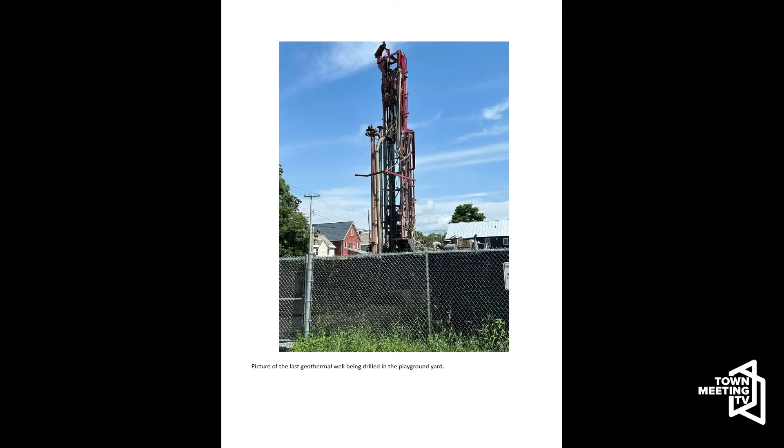Yes, because that is now removed, we need bigger ductwork to be able to bring the fresh air ventilation into each of the classrooms.

So if you supply air in, it needs to be returned out. Because we didn't have the ceiling space, the designers decided to put the ductwork on the roof. All right, so we're looking at the ductwork now.

The boiler room, 1904. I know we did some upgrades from then, but the original floor was there. So it was the dismantling of the entire boiler.

So there was no air conditioning in this building. Correct, so it was all heating. All heating facility. So there's a picture of the old boiler room.

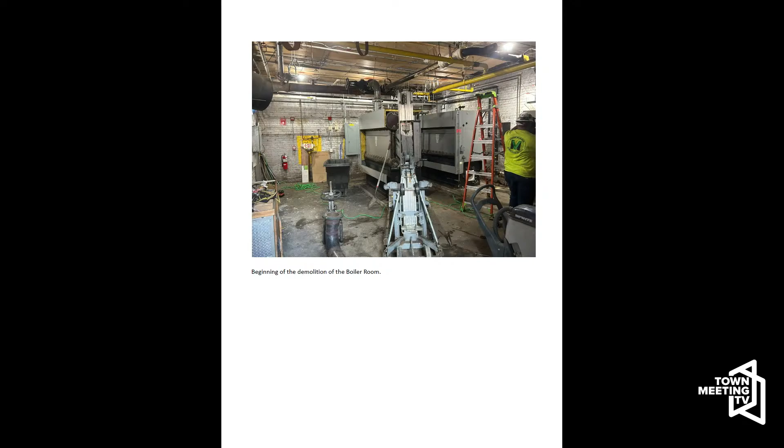And it said the old noisy air compressor was removed back in May, replaced with new electronic temperature controls. And I know that we're working with BED as well, and there'll be some pictures later.

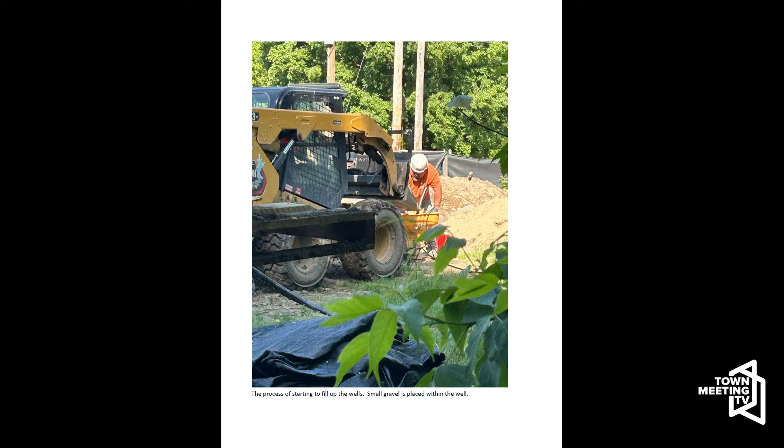I know we were running some electrical wires underground from the pole. Yep, new transformer that we had to put in.

So this is the start of filling up the wells with small gravel within the well. Process of grouting the wells, like you just spoke about.

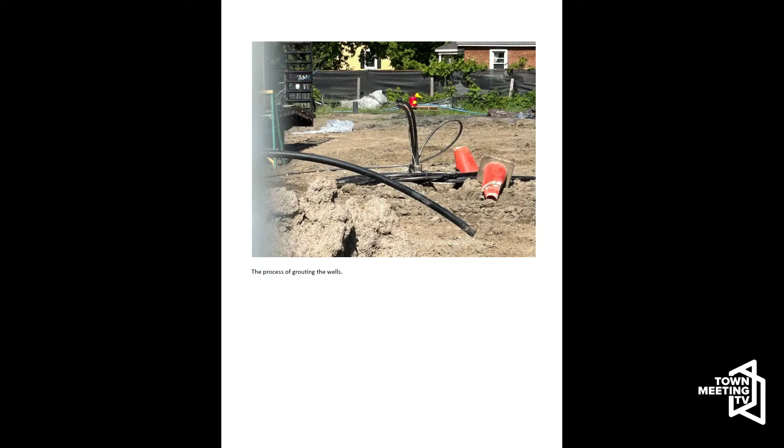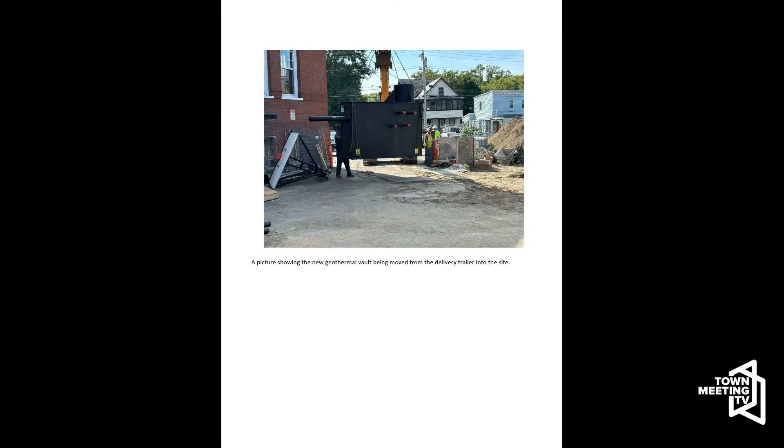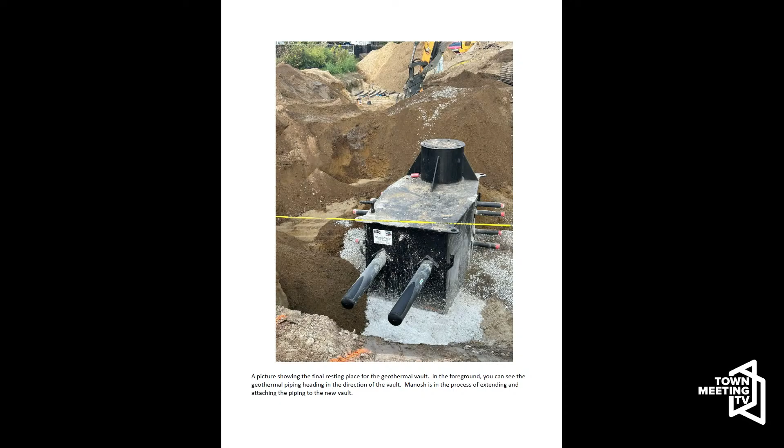So all the piping from all of the geothermal wells gets collected to this vault. Then from the vault, there's only two pipes, a supply and a return, as you can see at the bottom here. One goes into the building and the other one returns back to the vault, which as it returns is then separated into the 30 different smaller pipes that go out to all the individual wells. Unbelievable.

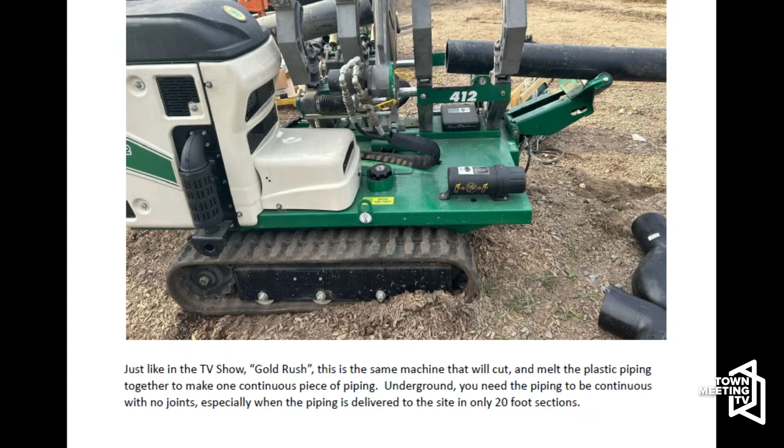And I loved looking at this machine. So the 20 feet piping, that's how, hopefully you're never going to be digging up for a break. But these are seamed together. Yep, so this is the machine that seams all the 20 feet piping together so that it's a seamless run from the wells to the vault.

Correct. Okay, amazing.

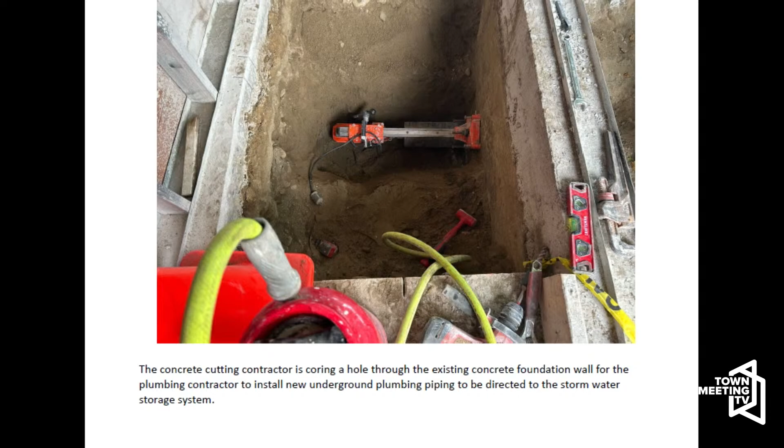And next, the concrete cutting. These are cutting the holes to get into the foundation, to get the storm piping from inside the building to outside the building.

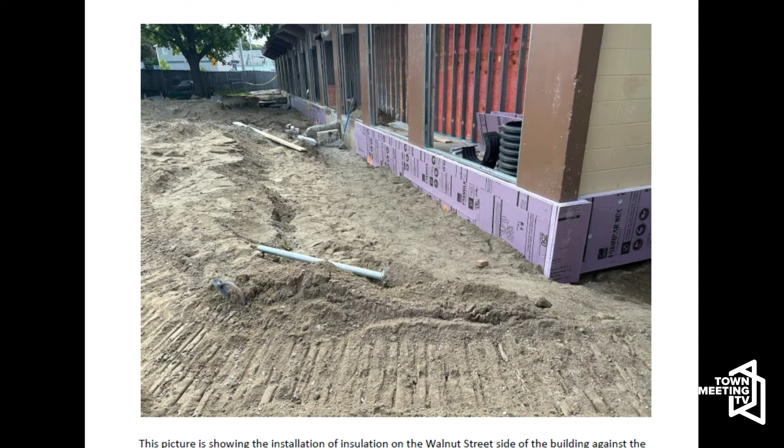Okay, thank you. And then, on energy efficiency, there was lack of insulation back in the 60s. Now there's new, more efficient insulation to keep this wing as warm as the main building. So all the purple insulation is against the foundation. More pictures of the foundation and how it sits up tight.

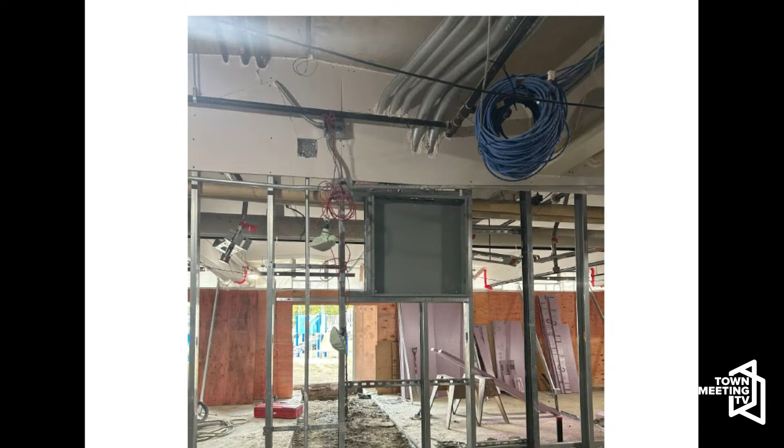And then the new conduits are installed for the new junction boxes all through. So a lot of the building - this is the cafeteria. No, that's one of the classrooms, leading out to the playground. Yes, correct.

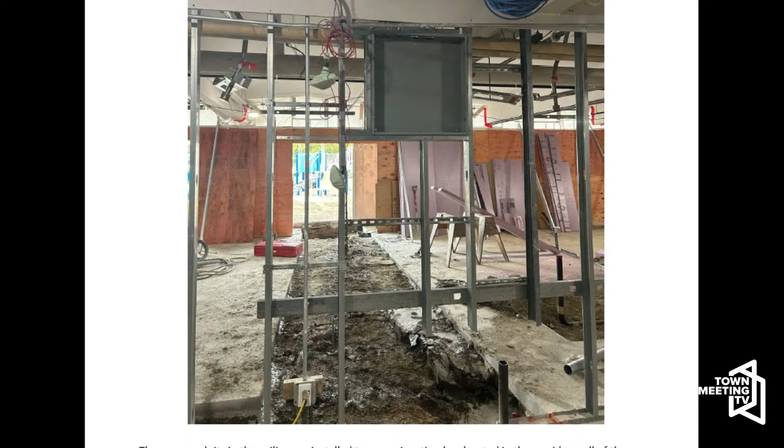All right, so putting all new walls, like you just said, new air in and out heating systems. So that entire 1965 wing, all the walls came down. Oh wow, amazing.

And here's the foundation that was being cut. Those are the two pipes that you talked about for this electrical room. All right, and the chimney.

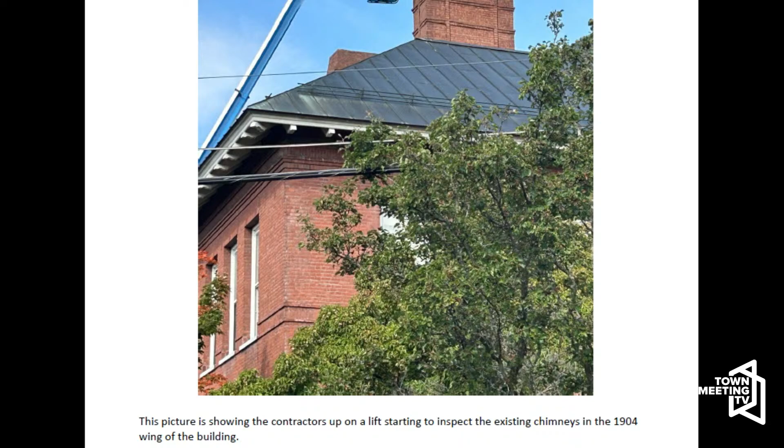I saw some interior photos of the attic, which were so interesting. What are we doing with the chimney? And I see the lift inspecting it. Yeah, correct, exactly that, inspecting it.

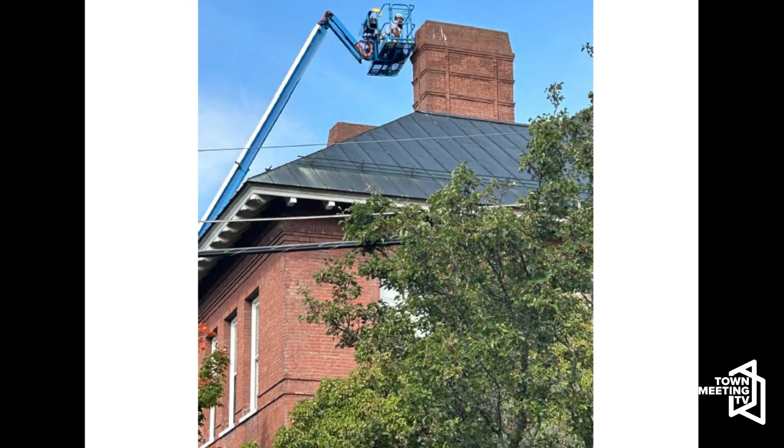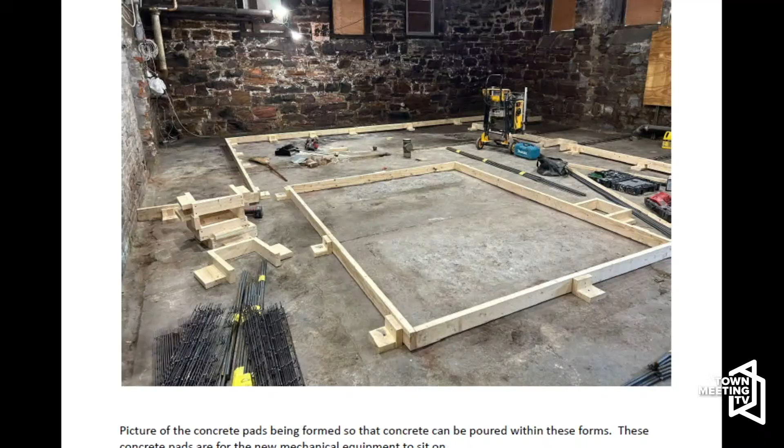Because we found that upon trying to run the new boiler flue up one of the existing chimneys, as the contractor got in to drop the new flue needed for the new boiler, they didn't like what they saw. They saw a lot of brick that were loose and whatnot. So we hired a consultant to come in and evaluate, because today's equipment likes to sit on a level floor.

Makes sense. And the old floor - because we had taken out a couple of walls within the old boiler room, which was actually the coal bin, and the coal ash that we found within the boiler room. So by taking those two walls out, it allowed the boiler room to get even bigger, to utilize that space. We like to set mechanical equipment these days on something that's solid and level.

This is the largest ticket price. When we think of the cost of the entire project, it's half the price, for a building this size and square footage. When we look at the budgets for this, that was your biggest price - your biggest investment. Correct, that's what I was trying to say.

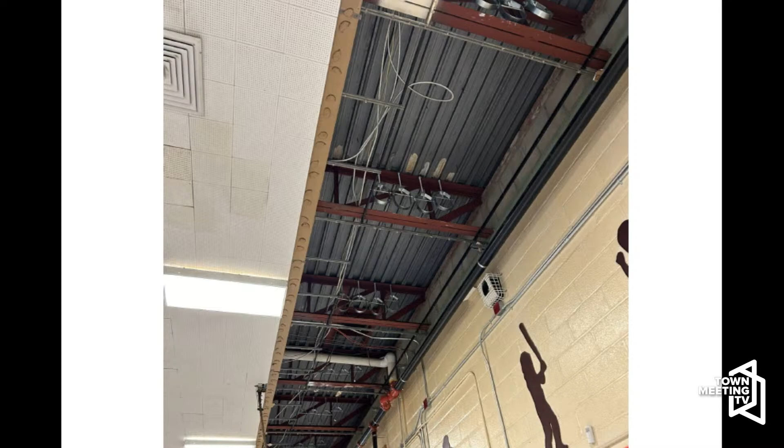All right, and a picture of the piping - I moved quickly over the dental area because we had to close the dental services down for this renovation to get to the exterior wall. And also the hangers - this is the gym. Piping can be placed so it's going up within the roof, in the joist space, so you're not losing any height from the building.

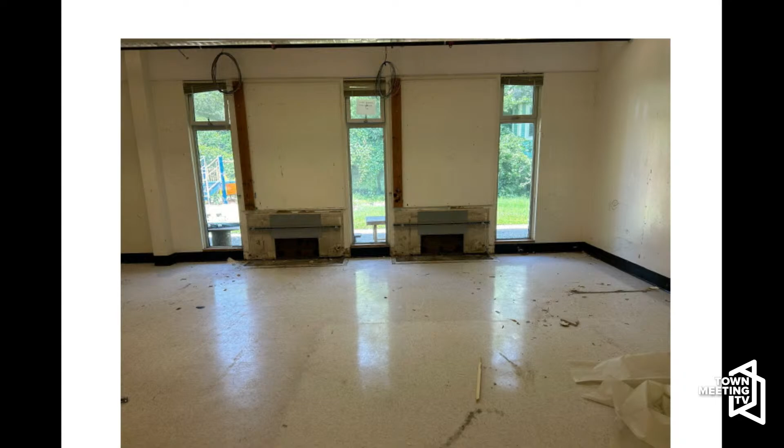Demolition of the mechanical room, the removal of the exterior walls. Thank you for these great pictures. I know they might make some people emotional, but I'm sure they know the investment that's being made, and the intricacies of what was under each of your cabinets.

And we're also getting new windows and lighting installed for the building's energy upgrade, and the bathrooms. That's just the storing, as much storing as we could do on site, within the library, and then what we moved over to St. Mark's to set up an entire school. So appreciative of all the faculty, staff, family and students that helped us in this transition.

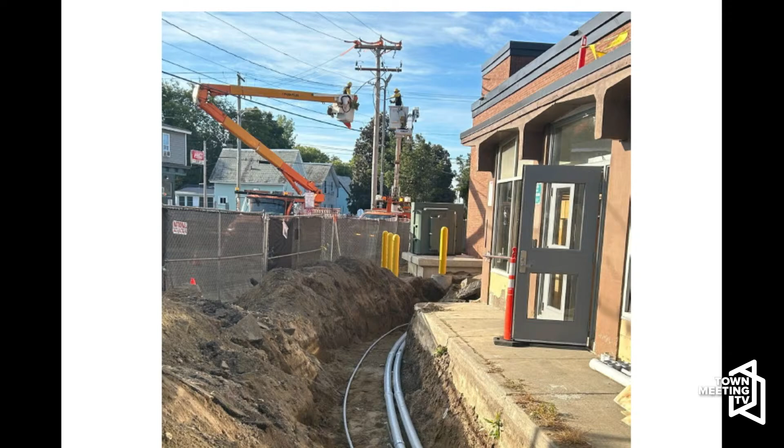It's invaluable. And now we get to the exterior of the building. What is all that piping? I see Burlington Electric Department on the pipe, on the utility pole. What is this piping along the ground?

So that piping is electrical conduit. Burlington Electric is giving us a new, bigger service, almost an 800 amp service. So we need to bring the new power into the building. Instead of putting it overhead, where there's really no ceiling space within the '65 wing, the contractor said, well, can we bury it? So we came up with a scheme to bury most of the piping exterior to the building, minimizing the conduit runs in the building above the ceiling. Wow.

So there's the start of the electrical conduits, goes from the telephone pole down to the new transformer. There's a major disconnect on the wall behind the transformer, and then from the disconnect going into the building are the conduits in the ground.

Wow. And for all your architect plans, how many sheets are we talking? Layers and layers, because you really start from the ground up.

If I had to guess, within the main packet of the architectural set, well, it was our vendors giving that exploratory work, that site work, all the things it takes, so many individuals coming together to give their professional opinion on the work they're going to be providing and services we're going to be providing and how they impact one another.

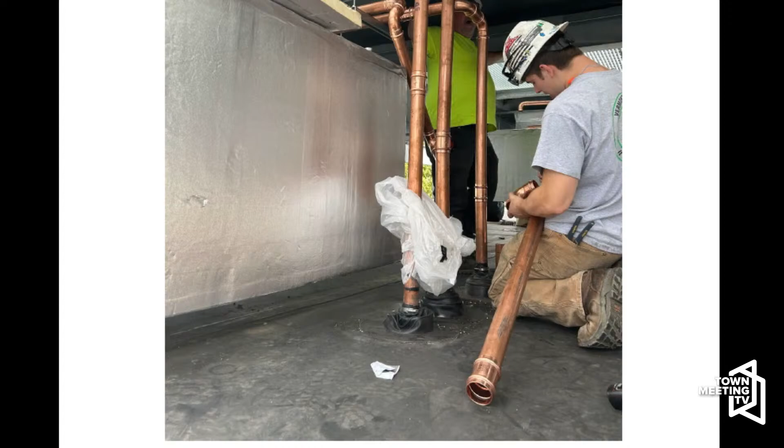Again, the piping in the ceiling, gone through the roof, installed by the roof unit, so we're going up to be the least, what's the word, least impactful.

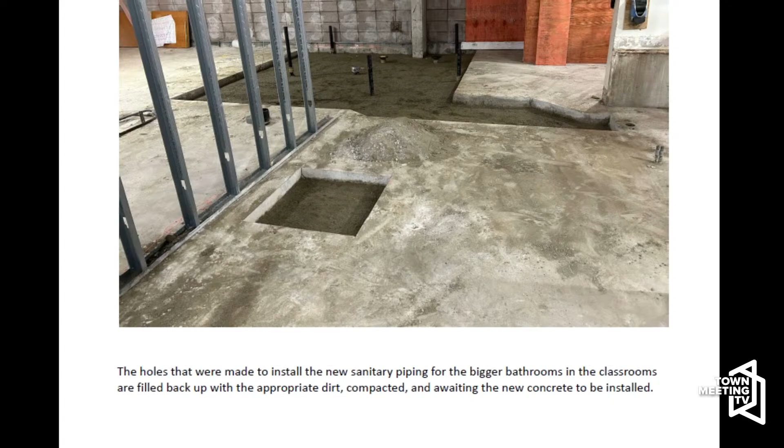Thank you. And I know the bathrooms, I remember we've had some overflow issues as well at IAA. So starting fresh with bigger bathrooms, not necessarily bigger, but because we had 1904 plumbing in some. We were spending so much money on parts that weren't available, fixing and Band-Aid. So to be able to start fresh and look at what's available is huge.

So these are the bathrooms on the 1965 wing. And using the excavator within the old classrooms.

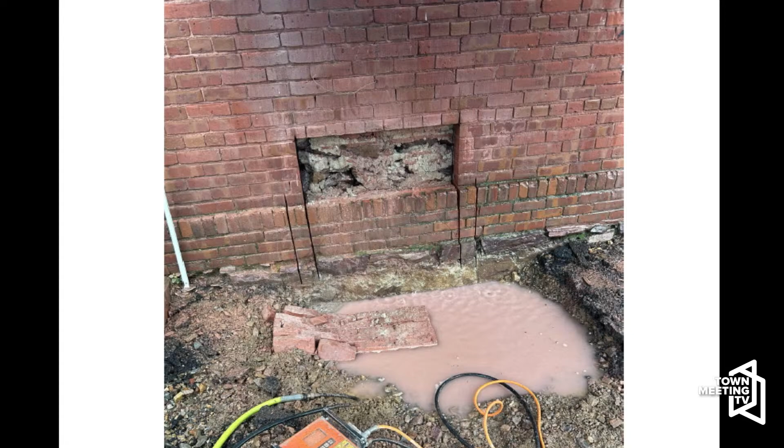The cutting of the new underground, the thermal piping. I remember when that opened up to go through to the boiler room from the outside.

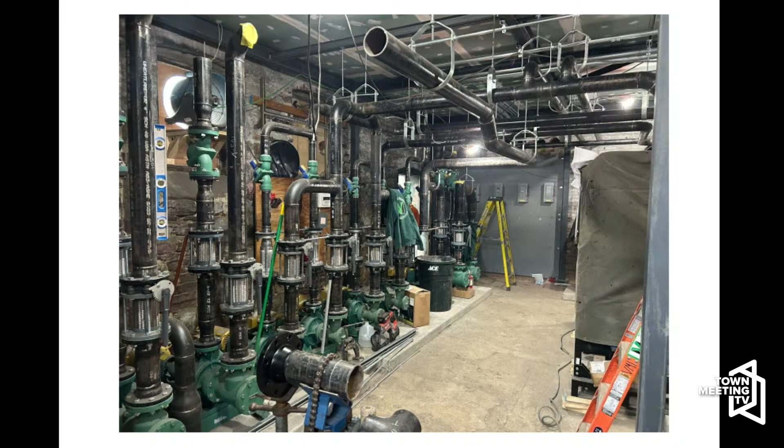This is the progression from Vermont Mechanical inside. Those are all the new units that head out to the geothermal.

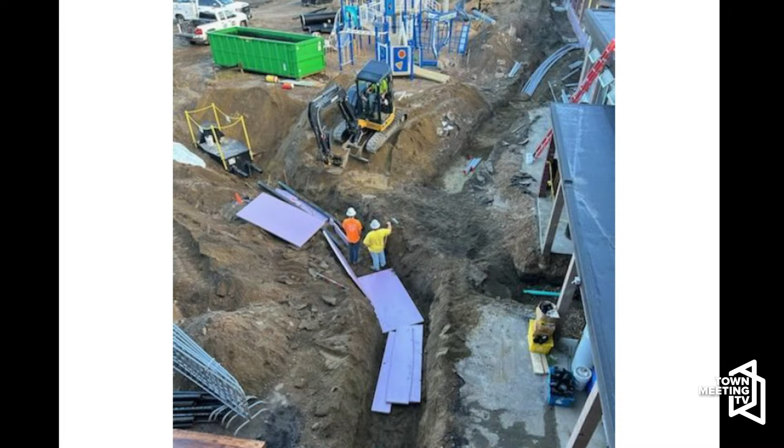Wow, amazing. And this is the bird's eye view. So going back a little to the geothermal from the vault.

Some of the playground equipment still there? Yes. Or working around it? Working around it, yes. Okay, great.

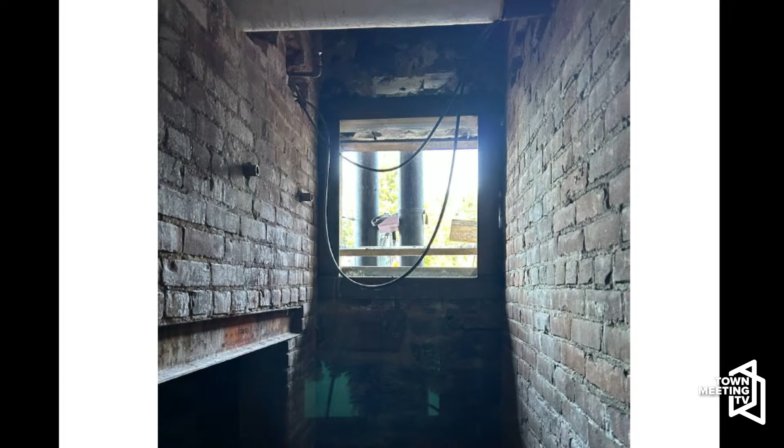Here we go, welding on the pipe like we talked about, making sure it's sealed. Ductwork going from the basement up into the attic, how efficient it is against flush to the wall, taking up the least amount of space.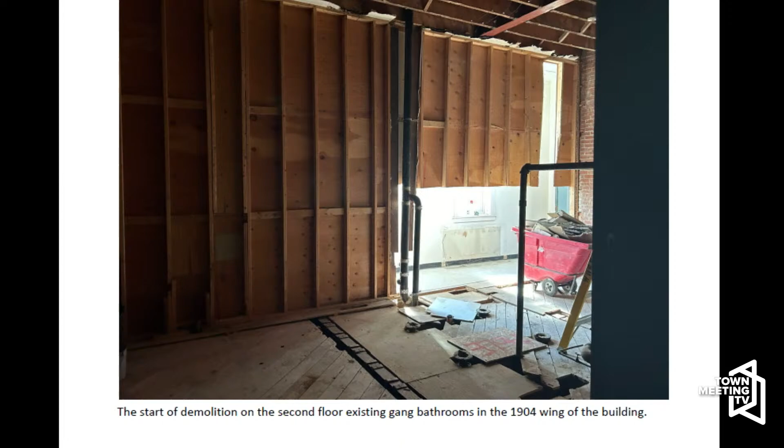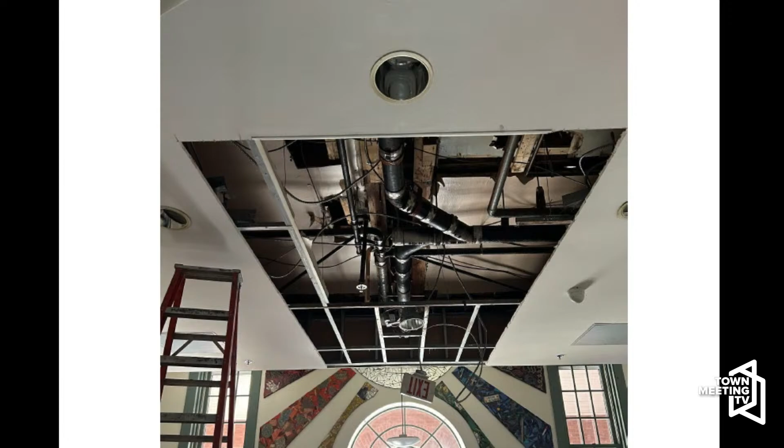Demolition on the second floor bathrooms. This is the back side of the second floor bathrooms in the 1904 wing. And the beautiful entrance, the picture showing the sanitary piping, which is from the ceiling, the lobby, to accommodate new plumbing fixtures.

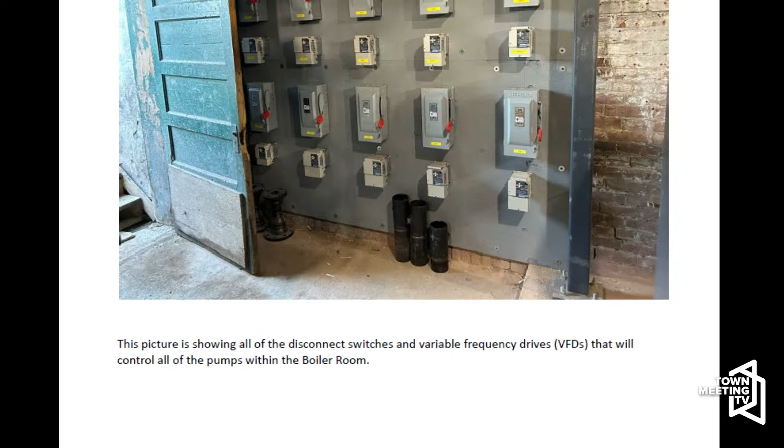All the pipes from the different areas coming through. Wow, so these are all... those are all the disconnect switches for the pumps in that boiler room in the 1904.

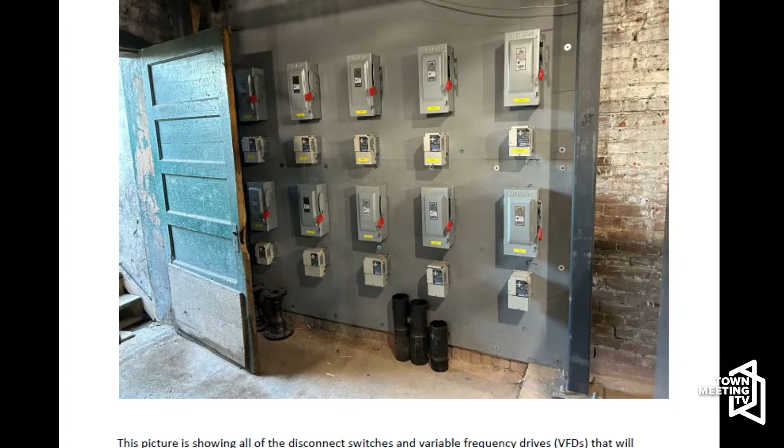So will we have a P-Touch machine and be labeling all these? Yeah, that's my favorite, when you go down and it says someone hit the breaker, right? Then you know who's doing what. What breakers to what device.

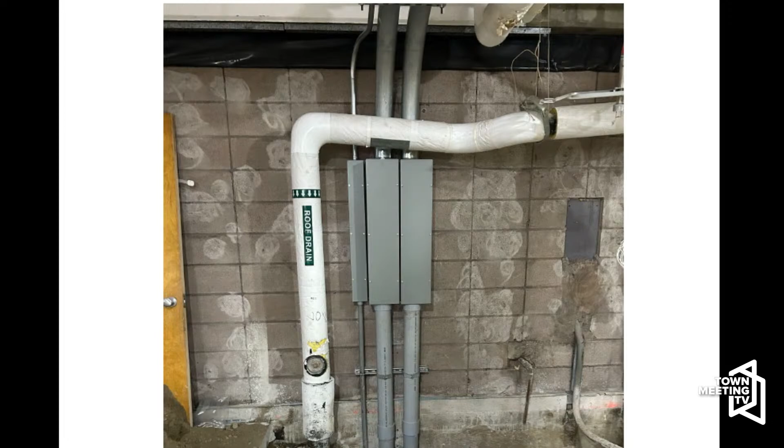The electrical conduits, the piping, roof drain. Unbelievable.

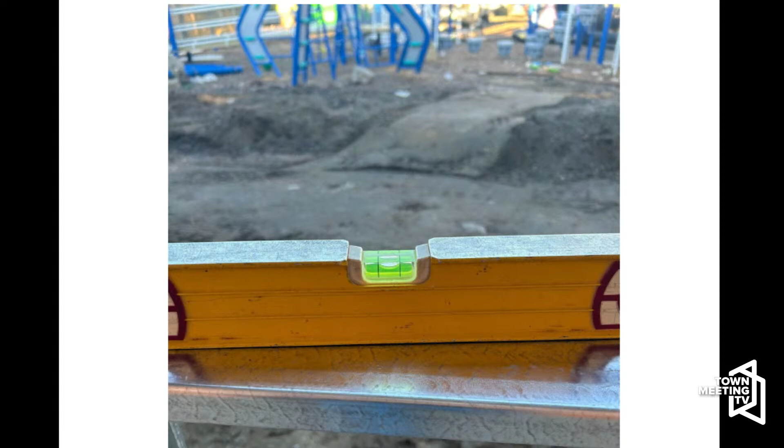Exterior walls now starting, so where are we at now? I know that some of these updates are the fall. I didn't look at my hard copies, but this is all the fall coming through there.

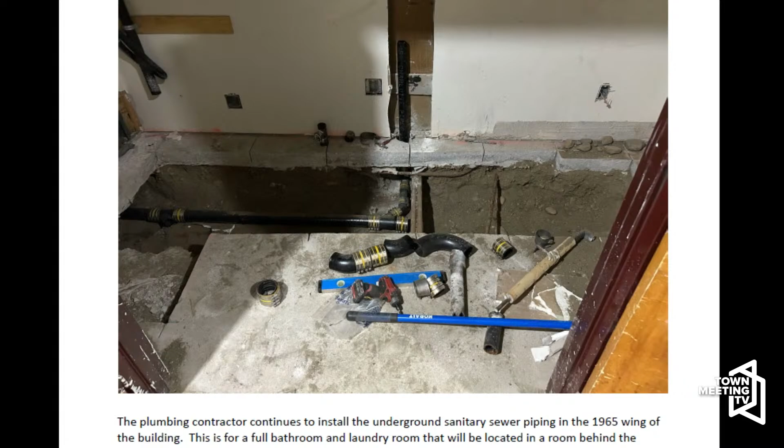Yes, we'll go through the plumbing, more plumbing, all throughout the intensity of all of this working from within. Electrical. And there's the 1965 wing.

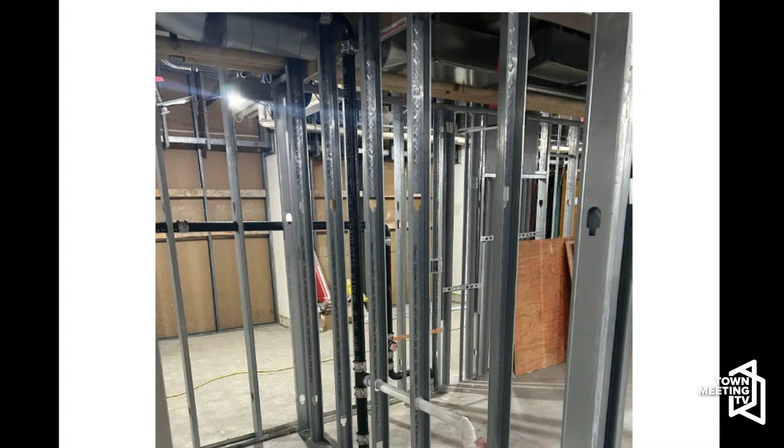This building was not up to code, so we were bringing it up to code based on these efficiencies. The new boiler...

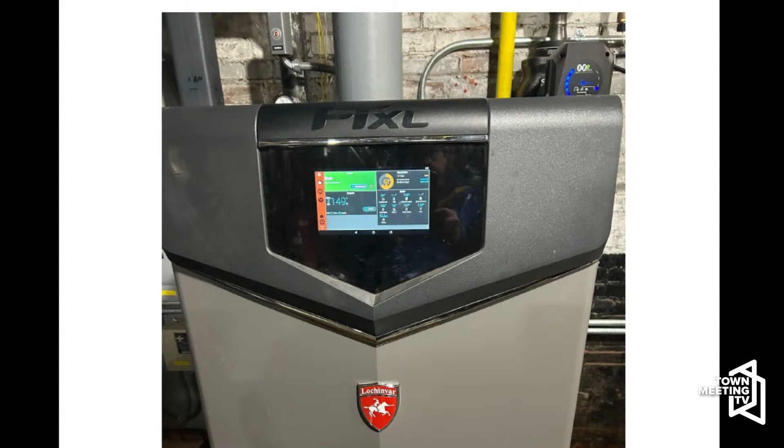Has been turned on for temporary heat for the workers. I don't remember, it said it's set to 80, but really it's 53. I laughed at that picture. Yeah, that was funny.

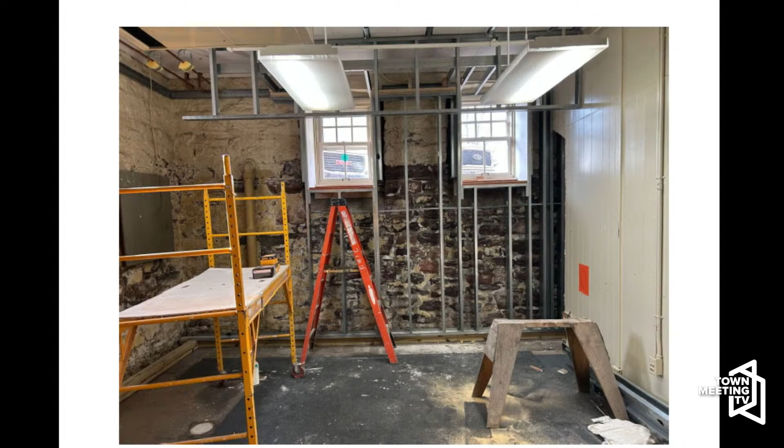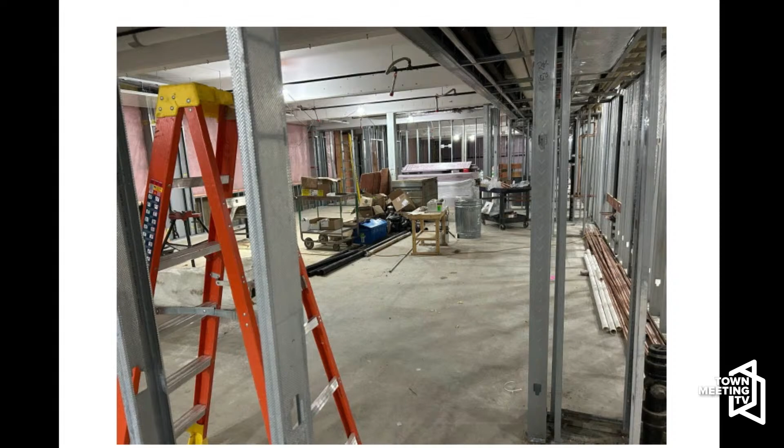It's coming to shape, and again, the brick foundation from the original, putting up the studs and the wall that would be sheetrocked. We have about 10 minutes left in our show. Looking at all this, again, all these photos are available with the updates online for people to look at.

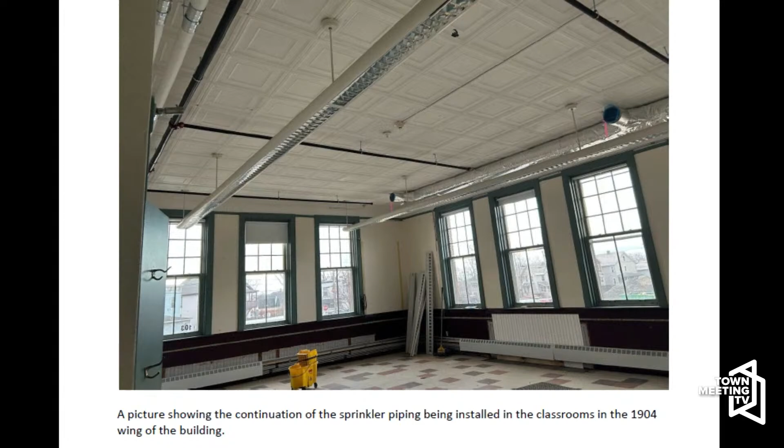I just love these windows. The sprinkler system - what is a, why do we need a sprinkler system for? So you don't, but you do.

So you do, because it's part of life safety. It's to keep everyone safe. So if a fire accidentally happened, then the sprinkler system would go off and start to put the fire out. Without a doubt. So that's bringing it up to code for the sprinkler system.

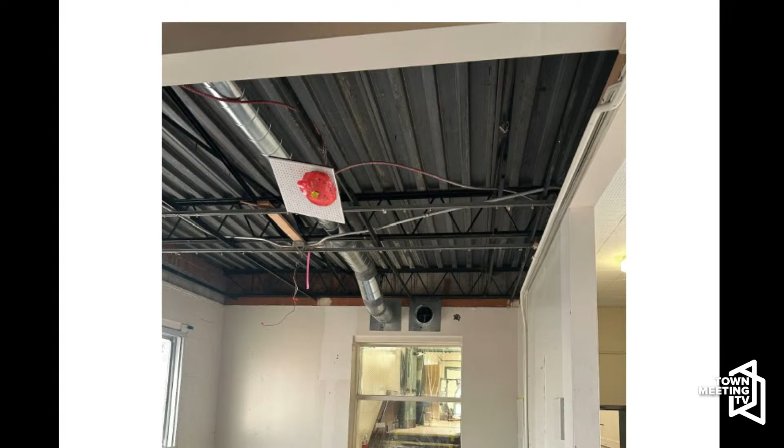Well, those are all the updates from all the pictures. And what are we talking about now? I know the timeline, I can go back to refresh my memory.

The next milestone, I think in another couple of weeks, we will start to see sheetrock on the walls. Then from there, I believe windows are slated to come in either the end of January or the middle of February. So that'll be another big milestone.

We're also looking sometime in January, after the first of the year, for the exterior walls on the 1965 wing. The contractor will come and start on his work. Even though we've now put an interior wall to cover up the old concrete walls, there's going to be an exterior shell that will also cover up the concrete walls on the exterior with its own insulation layer as well. That's going to be starting along with the cladding that's going to go over that exterior wall and the exterior insulation to protect it.

And that's the cladding that we all will see as we drive by the building and whatnot. So, aesthetics, right? Yes.

Wow, great. And then when are we proposing it to be completed? So the contractor right now, the main contractor, is looking to be done at some point in May.